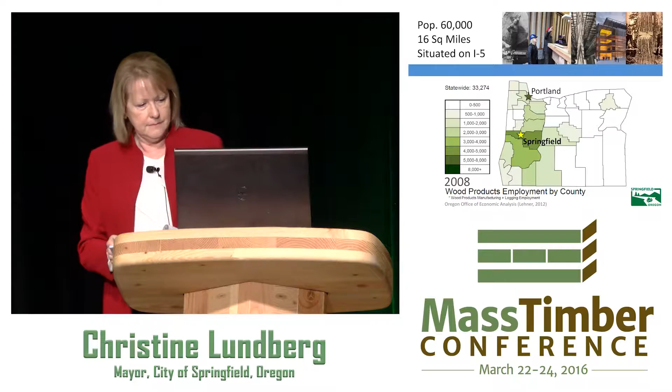And I want to point that out because we are actually known for our wood products, not necessarily because we are the real home of the Simpsons. But we've been a timber industry for a long, long, long time. Springfield Mill started in 1854 and grew from there and diversified.

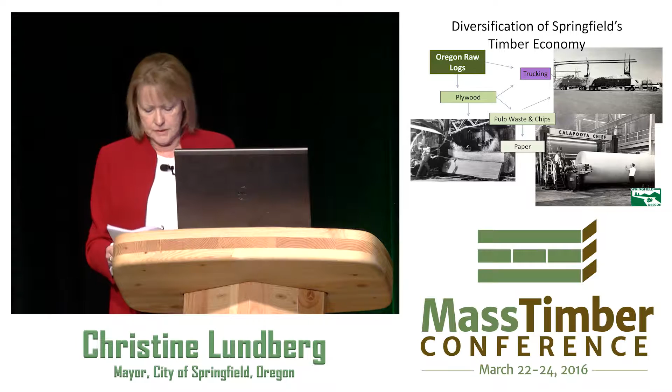Weyerhaeuser bought timberland that then became another source of product and started a plywood mill, and we grew from there and branched out into trucking and into fuel, and you can see how all of that has changed over time. And not only did Weyerhaeuser buy forest land, but they also opened a mill. And when they opened that mill, they changed how we dealt with wood waste.

And for some of us, we can actually remember wigwam burners. And that's the first time I thought that wood was cool, because I liked as a little child to see that fire coming out of the top of a wigwam burner. So many people probably don't know what those are either. But what Weyerhaeuser did is start to reuse that wood waste, and they created pulp and paper, and they had a pulp and paper mill, which is now still a pulp and paper mill.

It is owned by International Paper, and they just put an investment into the community so they would keep that industry in Springfield, and that is very important to have our economic base solid, because that's my job, is to figure out how to keep jobs, how to grow the economy, and how to have a stable city. And when they put in the $101.6 million, that's their upgrade of equipment that they are installing. In turn, the city has given them a 5-year tax break.

It's called an enterprise zone, if you don't know what they are. And so we are foregoing taxes, property taxes, for 5 years so that that equipment can get up and running, and that we, in turn, are a partner with the private industry and give them that tax break. And that's what we can do as your public officials to help private industry be successful in a new and changing environment.

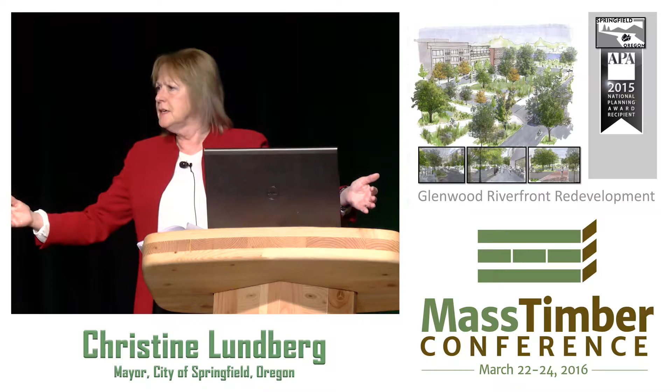So that's where we're at now, and we're looking at where we would put that CLT project, and we are redeveloping an area between Eugene on the west, Springfield on the east, and it's along a riverfront. No one even sees it now because it was industrial forever. We won an award for a refinement plan that we have figured out for that area, but for the pieces that the city needs to do, as an elected person, I have to put in some skin in the game.

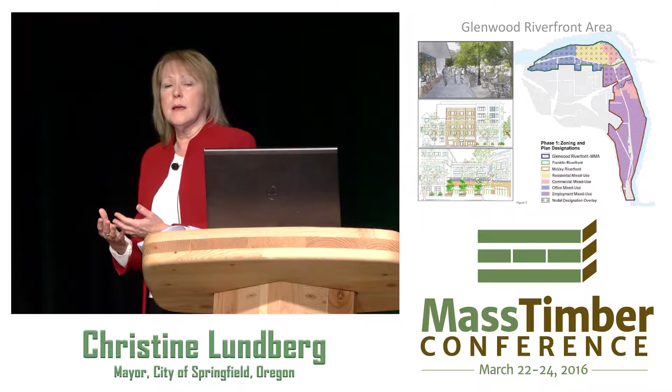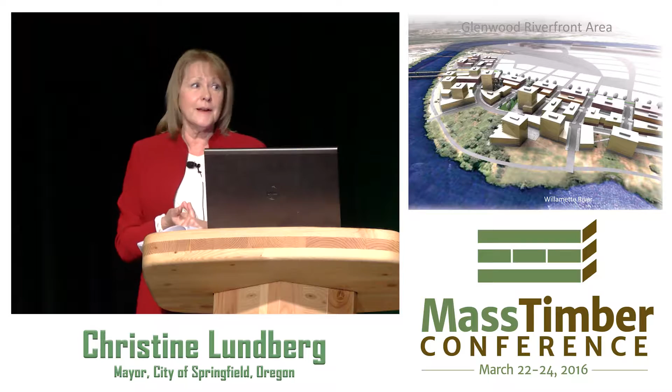So we do the infrastructure, we do the bike paths, we do the sewers, and we need to put in a parking structure so we can stay high density. So we can build a concrete parking structure, or we can build a CLT parking structure. So yeah, it's way out there on the edge of, okay, what can you do? But then again, why let that hold us back? Let's just figure out how to do it.

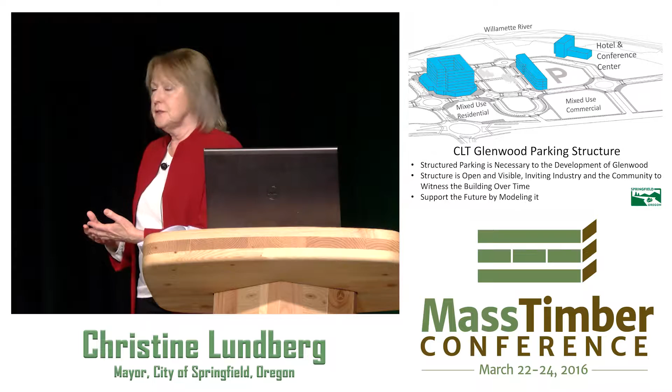So who is the better person to be able to do a parking structure design than a lot of bright and creative minds? And where are they? At the University of Oregon. And the University of Oregon School of Architecture students are putting together some designs for a CLT parking garage. And so it's not just, it's a reality. It's going to be a reality.

We're going to put out an RFP in the fall, and we will have someone picked this year to actually build not only the parking structure, but the development that goes in around it, which we're hoping for a hotel conference center. So keep posted, because we're going to be looking for those developers through our RFP process. So I want to introduce Judith Sheine, who is head of the architecture department and was the visionary to help take us to this next level and to actually design a parking structure for us.

Is it on? Yes, right. Sorry about that.

So Christine approached me at the Oregon Leadership Summit, not last December, but the January before that. At that summit, Thomas Maness and then Dean Frances Bronet, who was then Dean of the School of Architecture and Allied Arts at University of Oregon, made a joint announcement about the launch of our new collaborative National Center for Advanced Wood Products Manufacturing and Design, which we were extremely excited about. And I want to thank Christine, because she was really instrumental in lobbying with the state legislature to get the funding for that center. And I want to thank you yet again for doing that for us, Christine.

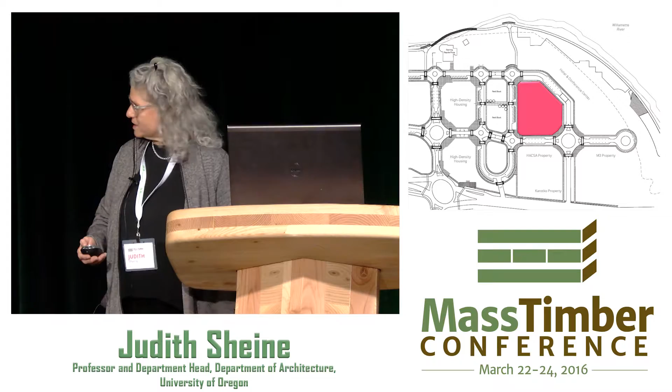But the site was between a number of things. I think it's clearer in the next slide, which is where the giant P is. It was across from a planned hotel and convention center. There's some housing to the west of it and mixed-use development all around it. And we were told we needed to have an entrance that related directly to the hotel and convention center.

So we had a program of approximately 400 parking spaces. We talked about putting an event space on the roof. We had talked about this fantastic parking garage in Miami that a number of you may have seen, designed by a Swiss architecture firm, Herzog & de Meuron, which is used as an event space on the roof, used certainly by architects all the time.

And we talked about having an event space that would have a fantastic view of the river, that there had to be an active edge of retail and office, and a link across the street to the hotel and conference center, and also, because that wasn't quite enough program for us, the pedestrian link through the site from one side to another, really splitting the garage into two pieces.

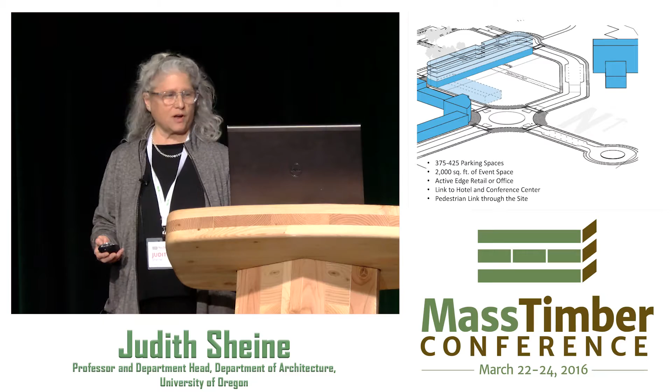So I think that I probably don't need to go through this. Why mass timber? The history of Springfield made a big difference. Our department has been known as number one in sustainable design in the country since the 1960s, when John Reynolds came to the University of Oregon and started teaching everybody about solar and daylight and all sorts of things.

So it seems logical that our department would be involved in an advanced wood product effort with the College of Forestry and with the City of Springfield, which has had a very long history of wood. And this slide, I think, is one that has been passed around from Michael Green to Thomas Mannis to this presentation, but you've seen it before, I think. But mass timber really can make a huge difference in building. Our big question is, could it make a big difference in building a parking garage?

So this really took a massive effort, and we ran the studio more like a regular office than I think most architecture studios are in school. So we had a client, an actual client, City of Springfield, who we met with very, very often and were kind of on speed dial with us in the studio. Courtney was great and really on top of things.

Not only did we have Michael Gershfeld commuting up from Southern California, at least 4 times during the quarter, but I worked in the studio with Assistant Professor Mark Donofrio, who is both an engineer and an architect, and worked in some big engineering offices in Chicago, engineering and architecture practices, Halvorson, and then in SOM before coming to University of Oregon. And we worked with Michael Gershfeld.

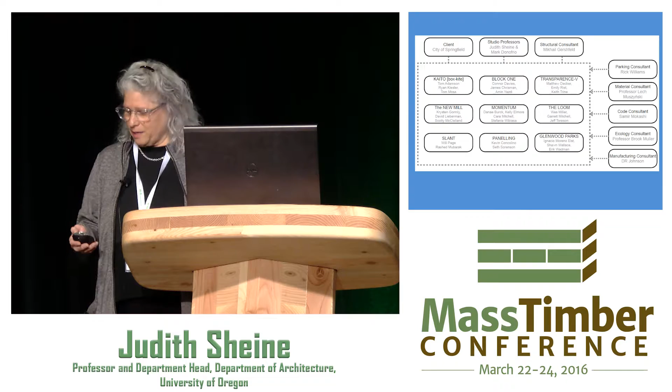And of course, we had a manufacturing consultant, D.R. Johnson. And we took a trip down to D.R. Johnson last spring, and this is a photograph of our class sitting and standing on the first structural CLT panel ever produced in the United States.

We were extremely excited about this, as you can see, and want to make it extremely clear that we're from the University of Oregon. Apparently they're all, what's the other one? Beavers fans right down there. So you can see the students with the O's everywhere. They were very gracious to us, even though we, of course, come from the rival university.

And they also visited the studio a couple of times. John Redfield, who was working on our union building across the street, dropped off a very large sample of CLT for us in the studio and visited. And we also had an incredible amount of interest from our elected officials. Not only did Christine come to a number of our reviews, but we had representatives, staffers from Jeff Merkley's office, from Wyden's office, from DeFazio's office. There was an enormous amount of interest in the studio, which I think basically served to terrify our students, right?

Right, so in 9 weeks, we got them to deal with a lot of issues. They had to deal with a client with changing urban design issues, with parking constraints, with structural systems, with the design of a parking garage, and also we made them deal with lateral force resistant systems, at least conceptually to a degree. The one thing we did not deal with, and we're on the quarter system, so the studio only lasts for 9 weeks. We did not deal with moisture control.

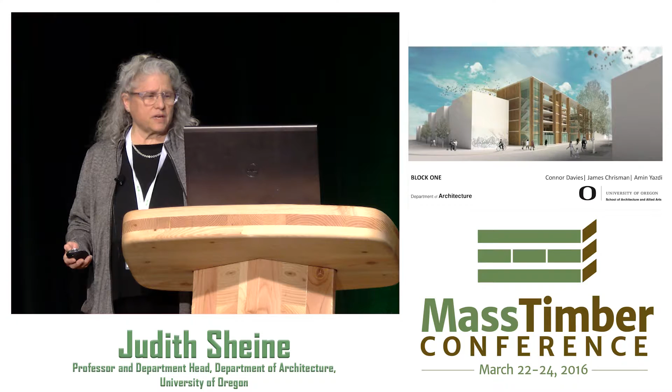This project, Block 1, took the theme of CLT shear walls very seriously in terms of developing it into a kind of aesthetic for the project. And you can see here in some of the details that the students really looked at a number of the systems that you've seen over the last day or so, hidden plates and rivet connections, and a number of systems that have mostly been used in Europe, Canada, and New Zealand, and not quite here yet.

This project, which they call Transparence-V, was really inspired by the Herzog & de Meuron project in Miami, where, a number of you may have seen that project, there's a series of V-shaped concrete piers that go in two directions to deal with lateral forces there.

So they did a version of that here using CLT panels in innovative ways to resist lateral in both directions, and with a sandwich system in the roof to deal with some of the detailing problems of connecting that. It didn't really work well with the post and beam system, and in concrete you just make a giant slab. So anyway, we looked at a number of ways of dealing with that kind of system, which is really designed in concrete, and how you might translate it into mass timber, into CLT.

This project, the New Mill, and you can probably see this better when looking at it from the inside. This one we looked at one of the systems that's been developed in New Zealand, which is a post-tension self-centering system using post-tensioning and split rings to design actually a fairly lightweight system, but using something that in theory would be self-centering and be resilient.

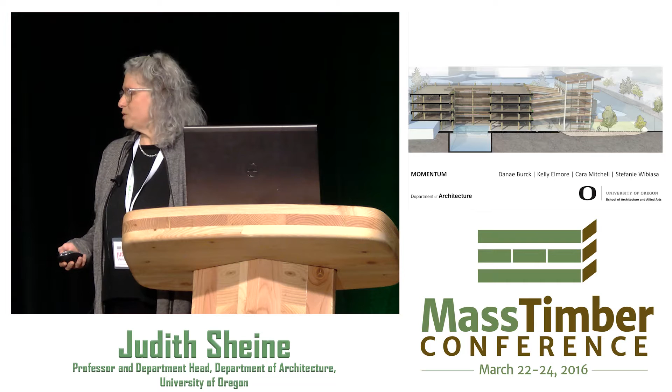This project, Momentum, the students managed to get a bigger footprint into it, so they managed to get it to be lower. It was 4 stories lower than most of the others, so we decided it might be the place to experiment with another system coming out of New Zealand, which was a post and beam moment resisting system using post-tensioning. And it's probably hard to tell at this scale, but the columns and the beams towards the middle of the structure are much larger than the ones out at the edges, because those are the ones doing the moment resisting.

And the columns are about 3 feet. The beams are really deep, and they have post-tensioning cables in them. And again, we have not tested these in real life, but we thought it was worth taking a conceptual look at these things. This is a view of it from the outside.

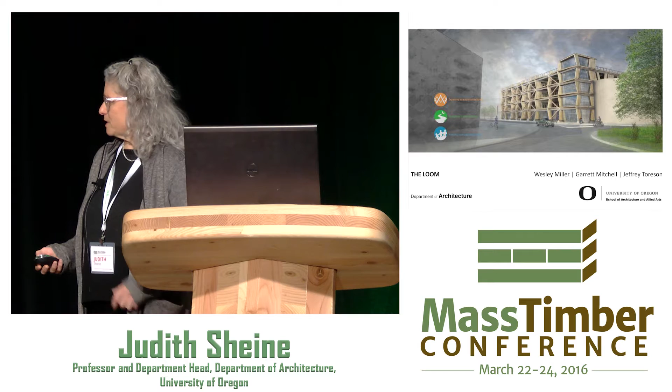This one, called the Loom, was another one that decided to look at using the CLT panels in a sculptural way, but instead of doing all of the cross-bracing with CLT, they decided to also look at it in terms of a cross-brace system.

But unlike some of the teams that really wanted to keep everything light and did a cross-brace system with steel rods, they decided to do a cross-brace system using more wood, with some fairly elaborate detailed steel connections. This one was called Slant. You can probably see why. It was also the only project that decided, instead of having flat parking levels, to actually have a continuous ramp all the way up, and they continued the slant theme all the way through.

And a lot of the schemes had courtyards in the middle. Our students are very concerned with daylighting. They also often use the courtyards for a series of water tanks that would progressively wash the effluent from the parking garage before it was dumped into the Willamette River. Again, a lot of ecological concerns, and you can see one of the courtyards here. And they used, again, steel rods for lateral in this one.

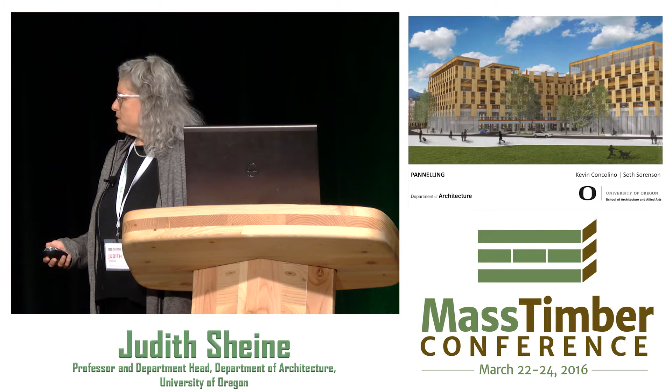This is one where they decided to really kind of create a facade out of it. They didn't actually use CLT panels because they felt it was basically just a facade and not structural. They used much, much lighter panels for that, and then spent a lot of time developing, again, sort of hidden steel connections for their post and beams, and again for the lateral bracing system.

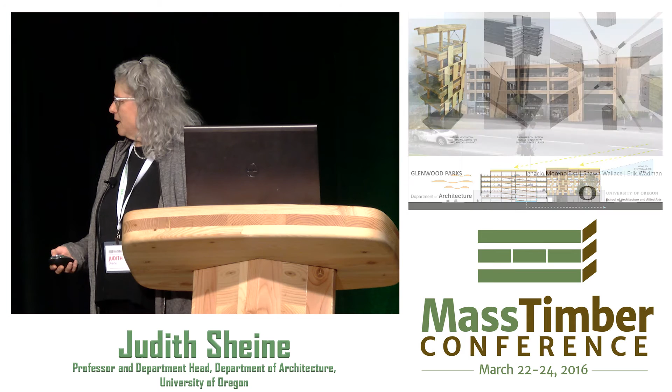And this is the last structure, the last of them, Glenwood Parks, where the students developed some ideas about using CLT panels on the outside, both to kind of create a rhythm and a facade in the structure and for the lateral load resisting system. And looked again in detail. This was actually a very large model that I have to pick up tomorrow morning and will yet again fill up most of my car.

Some of these models were on display at the World Forestry Center up near the Portland Zoo, where they had an exhibit of wood models. They called us right after we finished the studio to ask if they could have some of the models, so we sent them up there. And the students did some models that were 5 and 6 and 8 feet long to display some of the detailing that they had worked out. And you can see in the section up above that in 9 weeks, the students did take the project really enormously seriously.

So even though we don't expect that in a 9-week project we're going to get to things that can actually be built immediately, we got to the point where Springfield felt that it was feasible and they're moving ahead, which we're very excited about. And we know that some of the ideas that the students came up with are actually being incorporated into the project. So I think it was a great partnership. It was certainly fun for us, right? We are happy that you stuck with us through all the experimentation. We had, as Courtney will remember, and Christine, a very messy midterm review where it seemed like nothing was resolved and everything kept changing. But by the end, I think that we got to actually useful products.